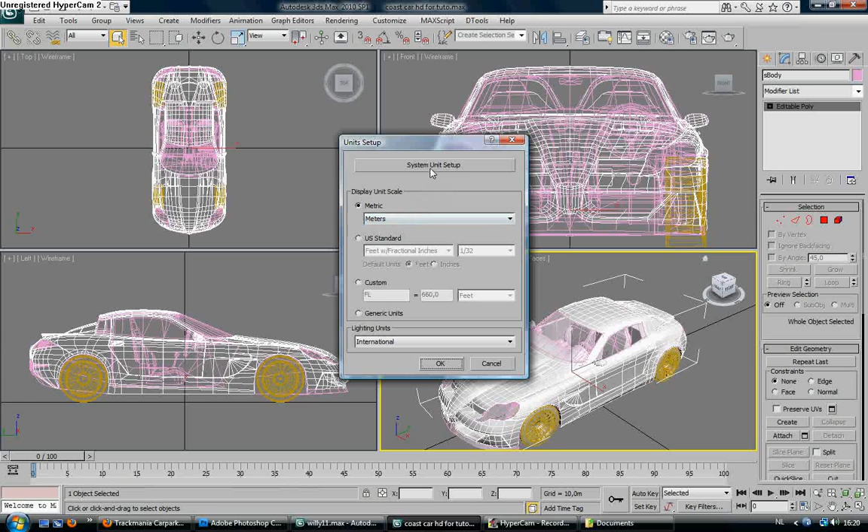First you need to customize your scene. Go to Unit Setup, check metric, meters, press System Unit Setup and set it to meters. Okay.

Then scale your car down to the size it needs to be. This car is already fitted in the max box, so I can delete them.

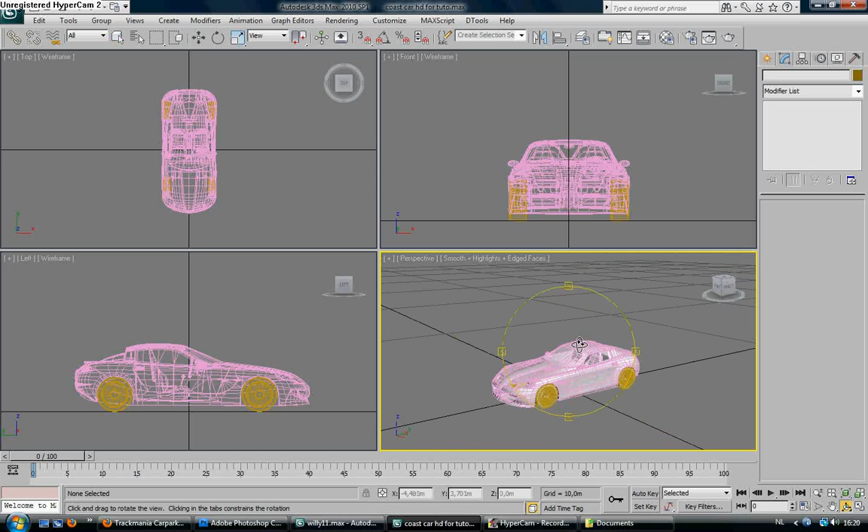Then what we need to do is import my scene. I'm gonna merge them. When you do a merge, take tutorial suspension, open, select all, okay, use scene material.

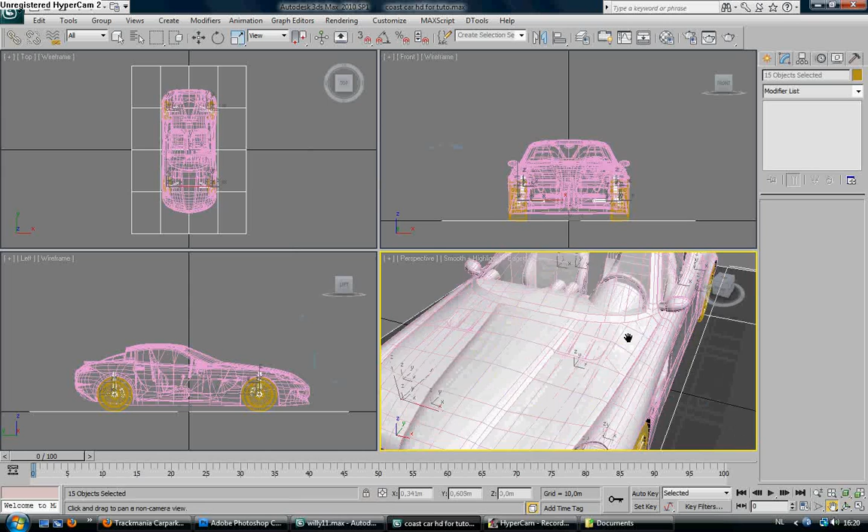What we have imported here is a full suspension kit, and we have the ProjShad imported. So we're gonna first start with the ProjShad.

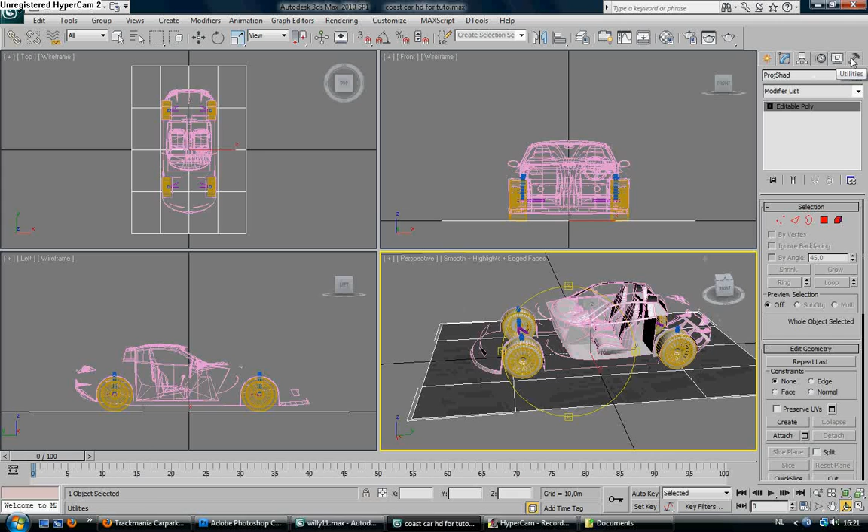Backface cull, okay, that's not so important, but I do it also. Then I go to the pivot mode, affect the pivot and center it to the object. It's just a plane from 6 on 4 in the middle of the world.

Then go to the Utility tab, it's the hammer. Then press rotate and press angle snap. Then you rotate it.

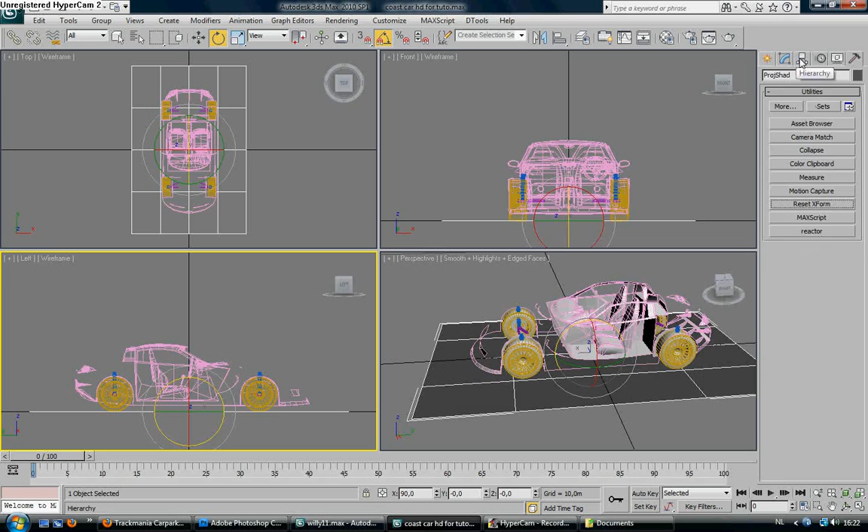In the left viewport to the back of the car, you see. Then press reset X form, reset selected, and then we need to turn it back to the front. Always first turn it back, then front. So now if we check the pivot, you see it's okay.

Now we're gonna do this for the suspension. First of all, we need to move the pivot so that it's on the bottom of the suspension part. Now as you can see, it's in the middle of it.

What I did was center to the object, you see, and then I press the move tool and drag it down to the bottom. Voila, to the bottom of the suspension part.

Then go back to the editable mode. When that is done, you need to place them in the position that it needs to be. For this tutorial, doing it fast, it's a bit too big and not the right angle, but for this tutorial it's okay.

So take it that this is your end position of the suspension. What you need to do next is make that the suspension part is horizontal in the front view. I do it now with angle snap, but normally you do it without. Then you need to write down how many degrees you are turning to get it into a horizontal position in the front.

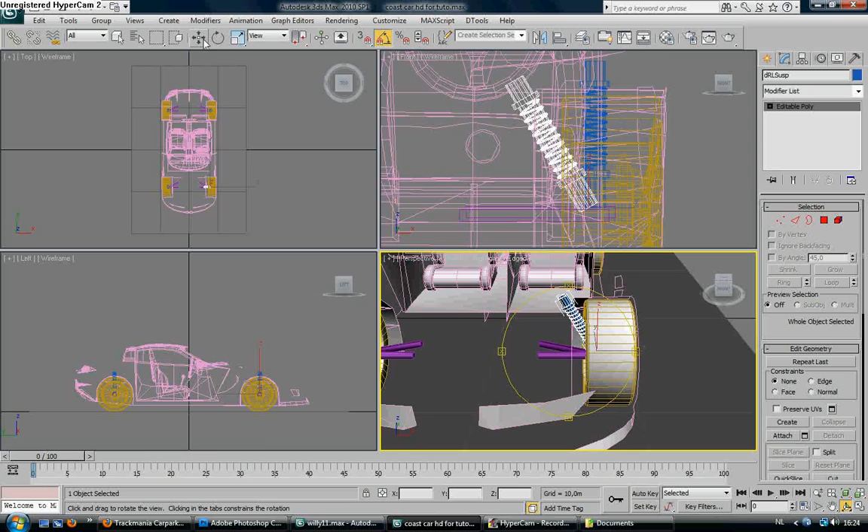So I press rotate and then rotate it. In this case, because I'm doing angle snap, it's just 60 degrees. Then you need to go to the top view.

Zoom in a little bit, and turn it vertical so it's to the front. So in this case, with my angle snap and I don't rotate it in other directions, it's again 90 degrees. I press the hammer icon,

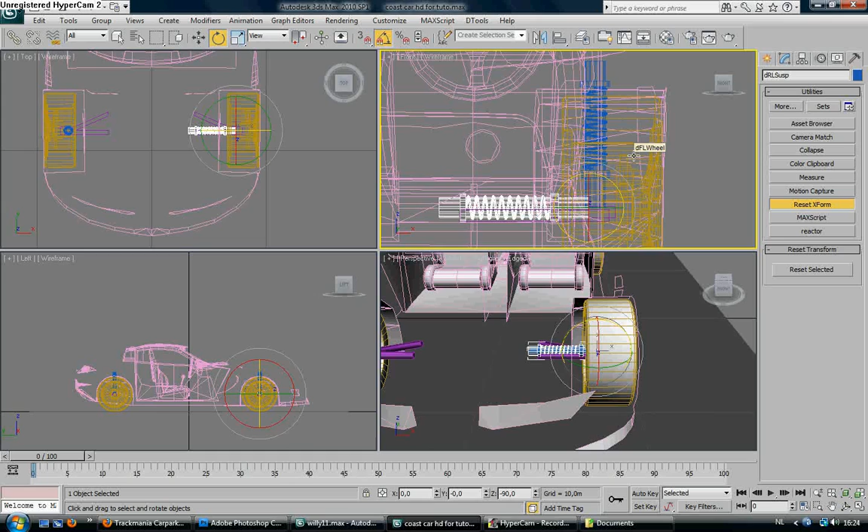reset X form, reset selected, then turn it 90 degrees back in the top view, go to the front view and turn it 60 degrees back. Always when you do here 60, you need to do 60 back. When you do here 90, you need to do 90 back.

When you do here in the top view, for example 50, you need to do 50 back. It's the same for the front view. So now the pivot from the suspension is ready.

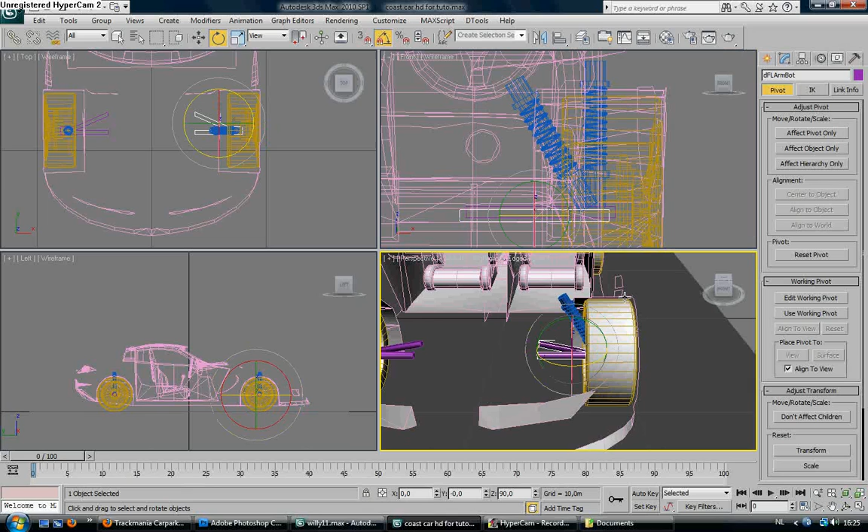Then we need to do the arm bot. The same here, affect the pivot and move it to the end of it, first center the pivot to the object, and then move it to the end of the

arm bot on the outside, and on this side you need to line it out to here, and for the suspension here, it's just like on the other side, on the bottom of it. So now all the

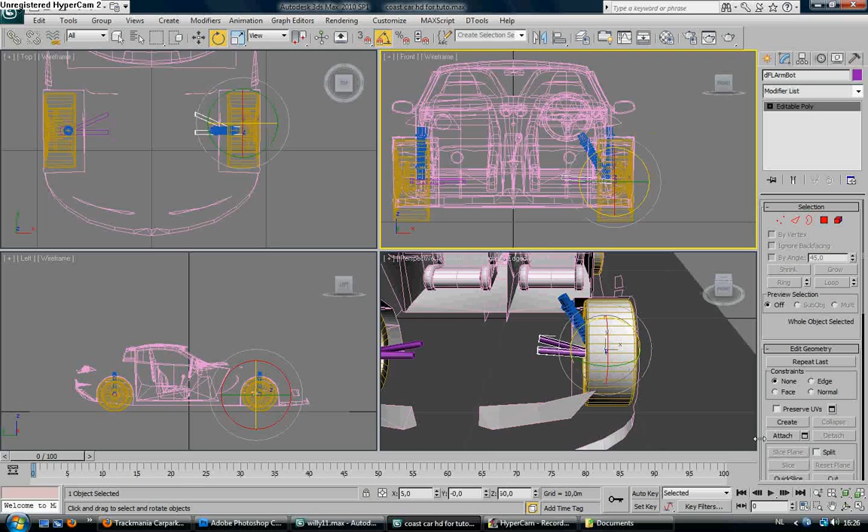front pivots are okay. Then what I need to do is put it in the position that I want. So I rotate it 5 degrees. It's just looking fine like this.

Then what do you need to do then? When this is your end position and you do other work, then before you export to Trackmania, you need to do the reset X form again on this part.

So what we need to do is the same as the suspension, putting it in the front view horizontal, check how many degrees. In this case it was 5 because I do it with angle snap.

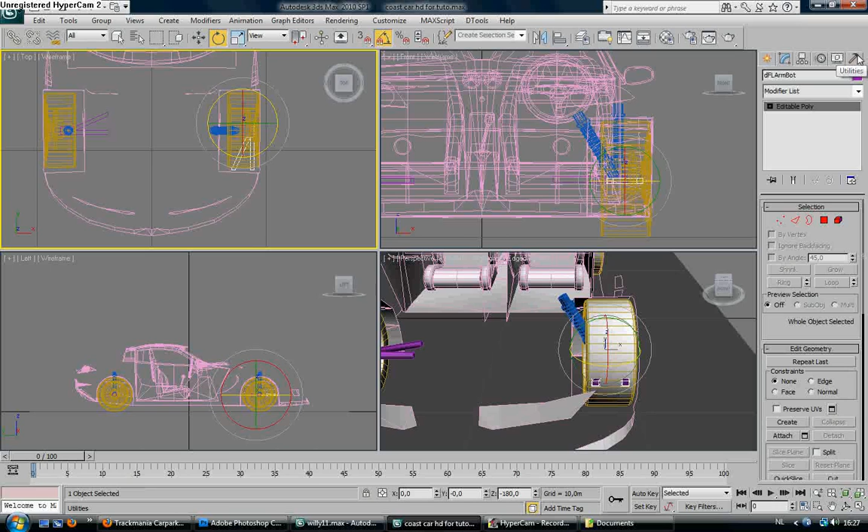Then go to the top view. In this case it's again 90, but it can be another number also, but in this case it's 90. Press the hammer, reset X form, reset selected, go to the modify panel, turn it 90 degrees back.

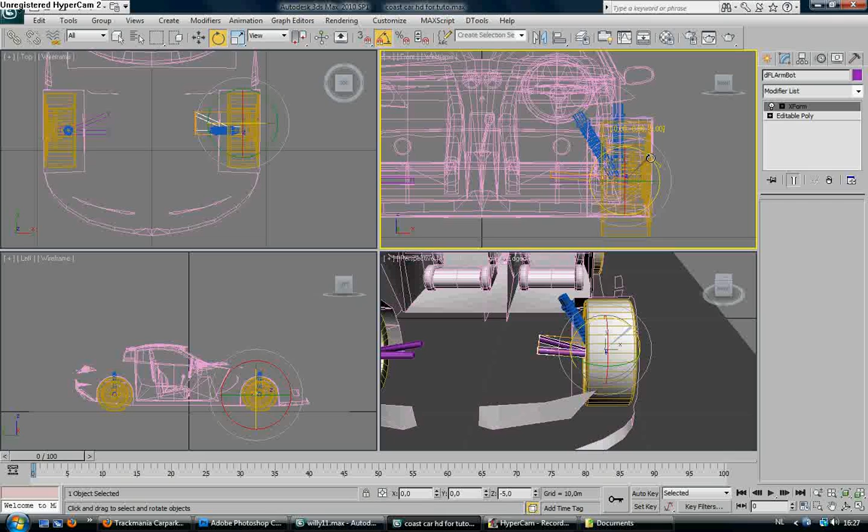Like I said, when you first turn it 50, you need to turn it 50 back, but in this case it was 90, so I turn it 90 degrees back. Go to the front view and turn it 5 degrees up again. So now the arm bot is also okay.

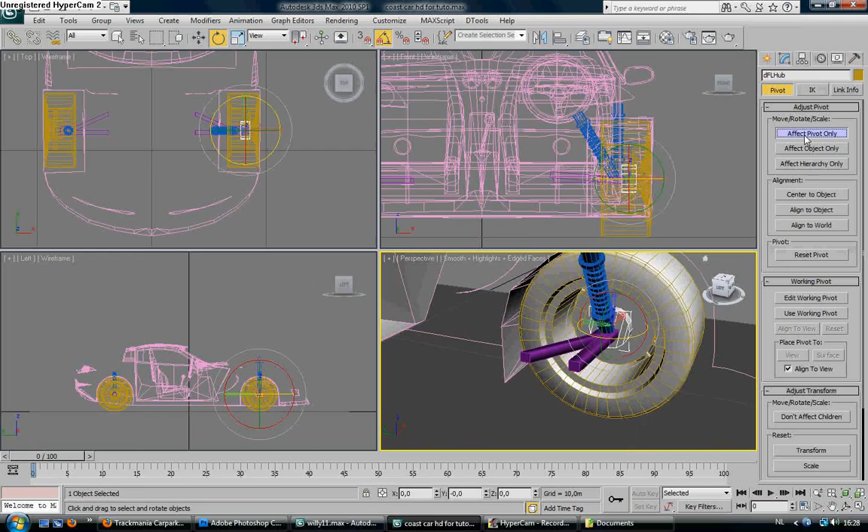For the wheel, just affect the pivot, click on the pivot icon, affect pivot, center to the object, reset X form. For the hub, I do it like this, affect the pivot, and then use the align tool, align to the wheel, okay.

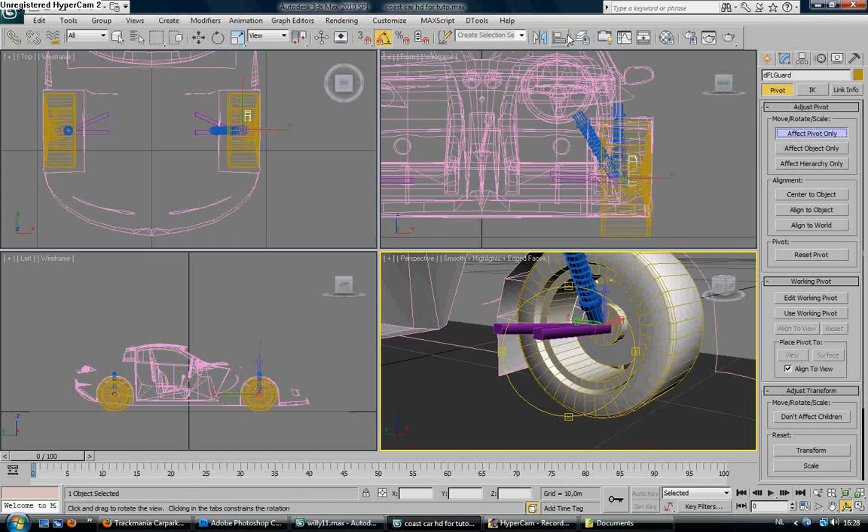Do a reset X form, okay. And for the guard, for the clipper, I do it the same as for the hub. I press affect the pivot and then the align tool, align to the wheel pivot, okay.

Or you can do center in this case, okay. Then press reset X form, reset selected. So, and now it's completely done.

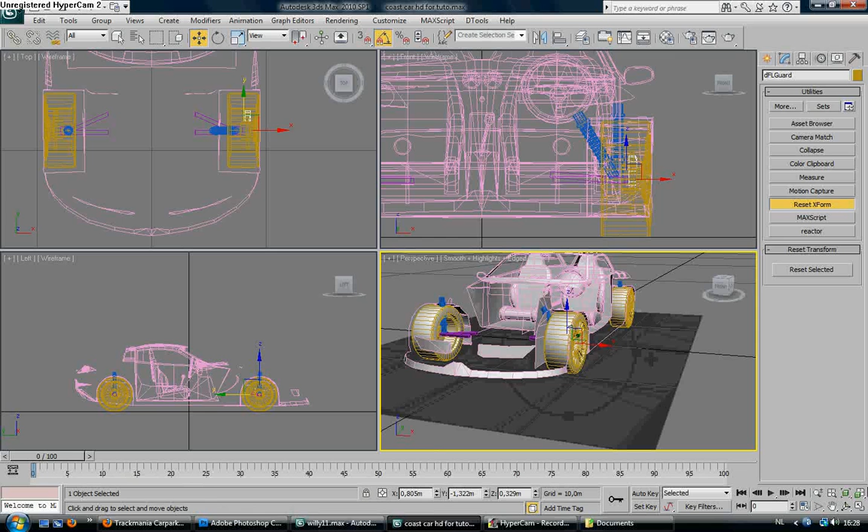So for the back and the front left side and the back left side, it's always the same. So I do this one really fast. So this is the end position.

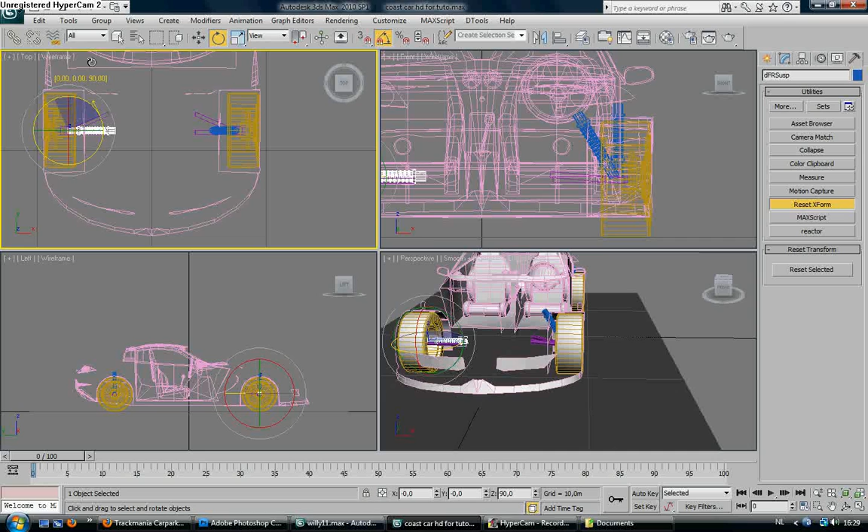So, and now if we check the pivot, you see the pivot is okay. So this was a tutorial for setting up the easy suspension.

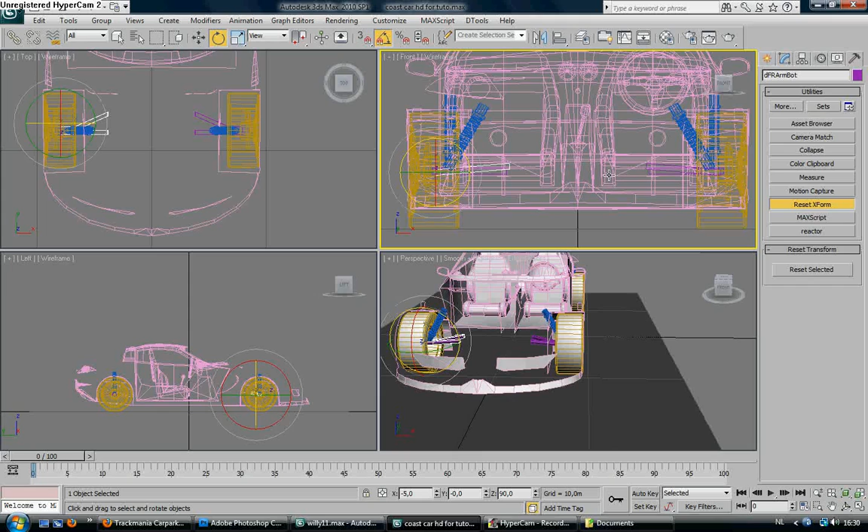Just gonna see, you see here in this case, horizontal in top view, turn it vertical, press reset, select it, 90 degrees back, and bring it in position 5 up like the other side. And here the pivot is also done.